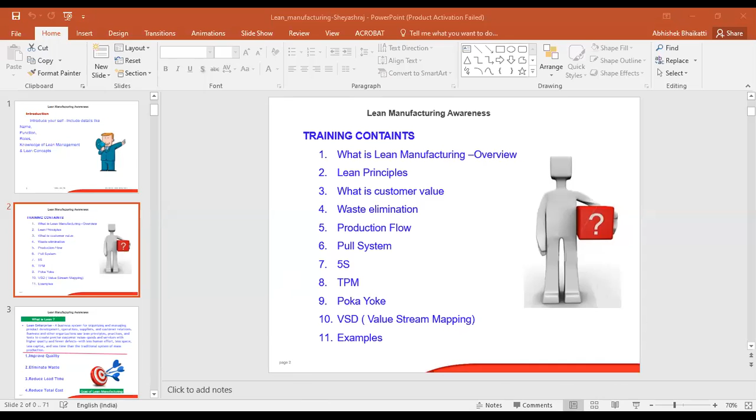Welcome all of you to our Sigma Business Excellence lean awareness training. In this training, we are going to cover these topics.

These are the agendas: what is lean manufacturing overview, what are the lean principles, what is customer value - we talk many times about value, but what does value mean? We can understand that through customer value. Then waste elimination - what are the kinds of waste, and why waste is so important in the lean journey. Then we'll see production flow, pull manufacturing system, 5S, TPM (total productive maintenance), Poka-Yoke, VSM, then a few examples.

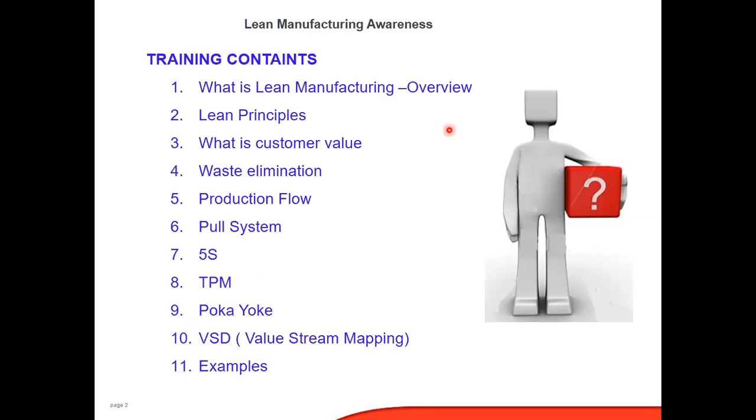So first we check here what is lean. What is a lean enterprise? A business system for organizing and managing product development, operations, suppliers, and customer relations. Businesses and other organizations use lean principles, practices, and tools to create precise customer value - goods and services - with higher quality and fewer defects, with less human effort, less space, less capital, and less time than the traditional system of mass production.

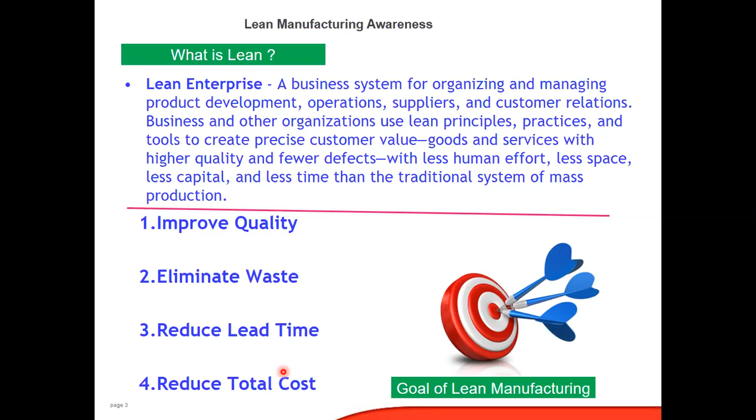So the goal of lean manufacturing is to improve quality, eliminate waste, reduce lead time, and reduce total cost. These are a few important goals of lean manufacturing.

So what should be a lean strategy for that? There must be a strategy. What happens in traditional strategy? We improve quality, but on the other hand, we require a longer delivery time and higher product cost.

Whereas in lean strategy, you can see here very precisely - this is a triangle known as the equilibrium triangle. QCD - the top one is about the lowest product cost, then improved product quality, and shorter delivery time.

These are the lean strategy, whereas very clearly in traditional strategy we only improve one parameter, one requirement, while two are on a downtrend. In lean strategy, everything is at the improvement stage. Look at this figure - it very clearly shows the difference. I hope you understand.

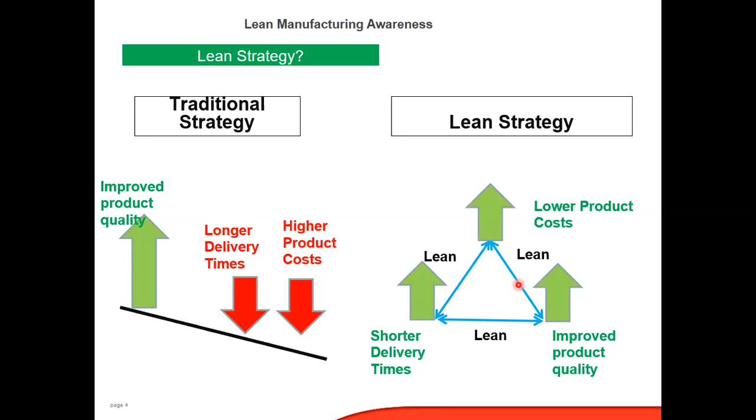Then there are the five lean principles. This is well known to everyone - what are the lean principles, what are the lean concepts? The first principle is about identifying the value.

The second principle is about mapping the value stream. The third principle is about creating flow. The fourth principle is establish pull. The fifth principle is seek perfection. So there are the five lean principles: identify the value, map the value stream, create flow, establish pull, seek perfection.

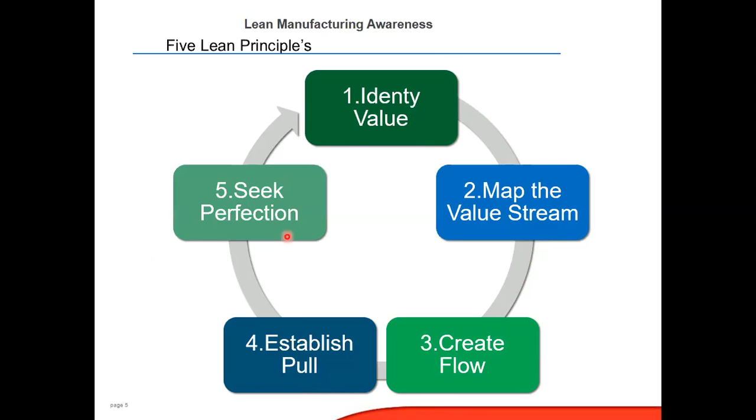Okay, then these principles are very clearly defined here - what is the pull principle and what are the advantages of using this principle, similarly what is the flow principle, what is the takt principle, what is zero defect.

The pull principle is about, rather than pushing, we have to pull the material from the upstream process to the downstream process. By applying this principle, we can avoid overproduction. We produce parts or provide service only when the customer really requires them. This way, our customer decides when, how much, and in what quality we deliver product or services - for example, by consumption control using Kanban. These are tools of the pull principle. We can see further examples in the next slide.

Okay, what is the flow principle? Make problems visible. We let products and services flow without waiting time and interruptions, starting from the customer order received to delivery. Therefore, we pass on the smallest possible quantities directly, and thereby reduce inventories and throughput times.

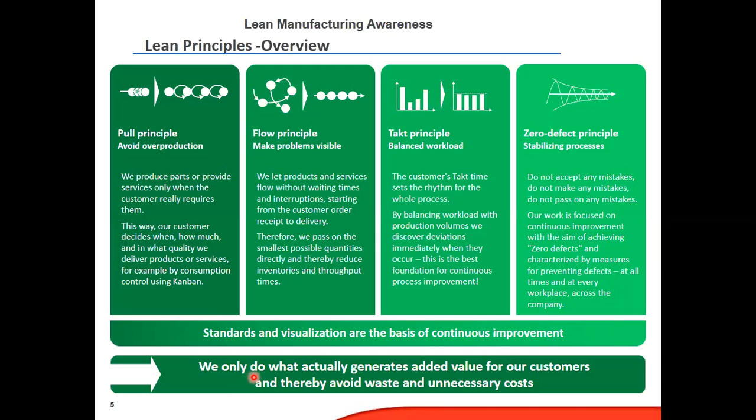And the last one is the zero defect principle - stabilization process. Do not accept any mistakes, do not make any mistakes, do not pass on any mistakes. Our work is focused on continuous improvement with the aim of achieving zero defects by preventing defects at all times, at every place, across the company. So for that, standards and visualizations are the basis for continuous improvement. We only do what actually generates added value for our customer, and thereby avoid waste and unnecessary cost.

I go to the next slide. So here we can understand what waste is. Normally, friends, all of you know that this concept is from TPS, Toyota Production System.

This whole lean management, a lean journey, has started by Toyota itself. Therefore you see many Japanese words used in this presentation - basically this concept is from Japan. They followed it first, then across the globe this has been accepted and found to be very effective for the continual improvement journey, for waste reduction, to create value for the customer, and create customer delight to make them happy.

So we can see here what are the three kinds of waste. Those are 3M - Mura, Muri, and Muda. Mura means irregularity, Muri means overload, and Muda means waste. What is Mura? Waste due to irregularity, inconsistency, and variance in the process.

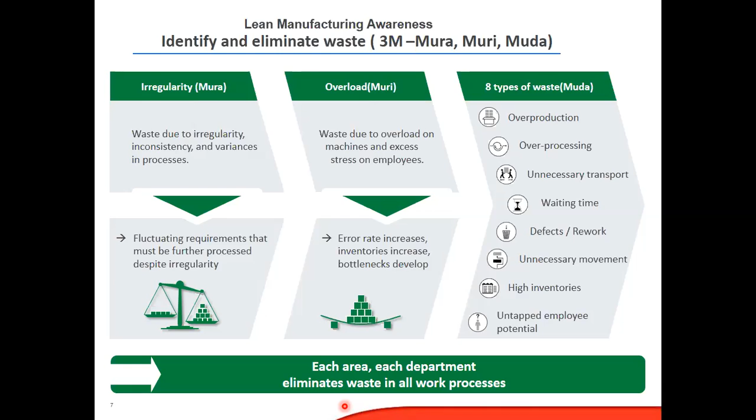Well friends, we go to the next slide. Okay, here we understood about what waste is, how to identify it, and the basic definitions of the waste types, etc. Okay, then I go to the next slide.